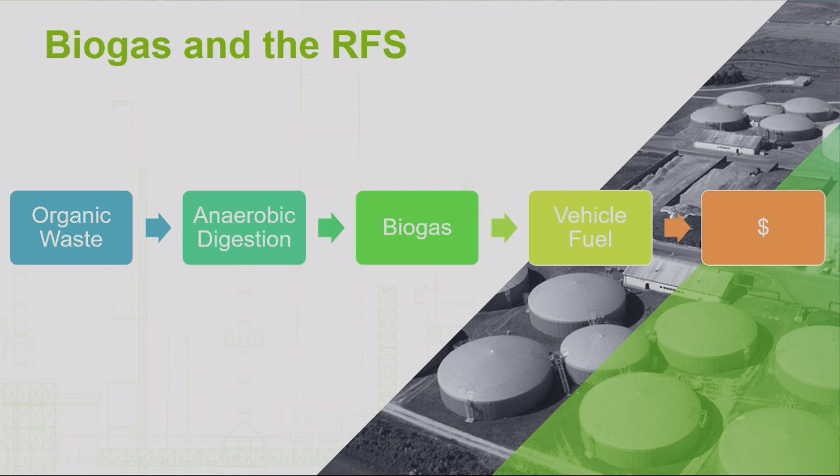So a little bit about the program behind this. It's called the Renewable Fuel Standard. It's a federal program instituted back in 2005 that really came to fruition in 2008. What it does is mandate that an increasing percentage of our nation's vehicle fuel comes from renewable sources. The idea was to get away from foreign fuel and reduce greenhouse gas emissions.

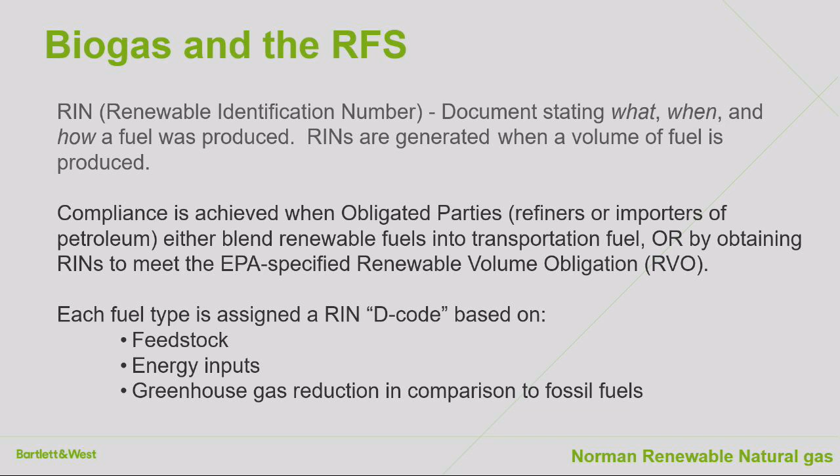Compliance in the program is achieved when the obligated party either blends renewable fuels into their fleet or purchases RINs to say, hey, we're doing our part to bring renewable sources to the market. Obligated parties are people blending fuels—it's big oil, it's BP, it's Shell, and those folks, ConocoPhillips.

So the flow of gas: you're taking raw gas from your digester, we purify and compress it, and once it becomes pipeline quality, you can produce that RIN. The gas and those RINs are traded to an energy service provider or third party who takes possession of the physical gas and those certificates. They sell the gas to end use, and the end user dispenses it as compressed natural gas or liquefied natural gas. The RINs are then sold to the obligated parties, and they provide that revenue back to the producer—in this case, Entegrity.

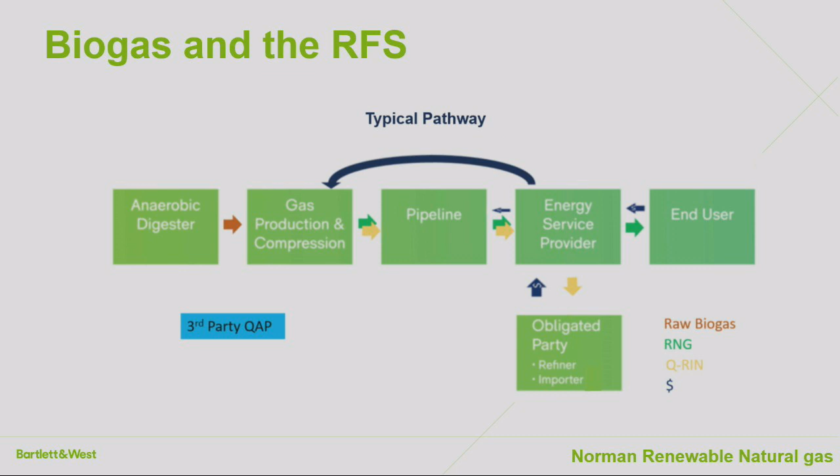The reason a lot of these projects are funded by third parties is because there are risks associated with the program. If you go back to that original chart, the program expires in 2022, supposedly. There's legislation being drafted that would extend the program, but right now we don't know what the sunset looks like. The law states the mandate is never to be lower than what it was in 2022 going forward, but who knows—we're hoping it will increase, but that's one of the risks they're willing to take on.

RINs are traded in a volatile market. Two years ago, a D3 RIN was worth $2.35.

In July of last year, they were worth 45 cents. Now they've gotten back up to about $1.30.

I'd already written down, what's the market like, and what's the city's risk? Does the Entegrity contract absorb any problems with the market that might happen in the future?

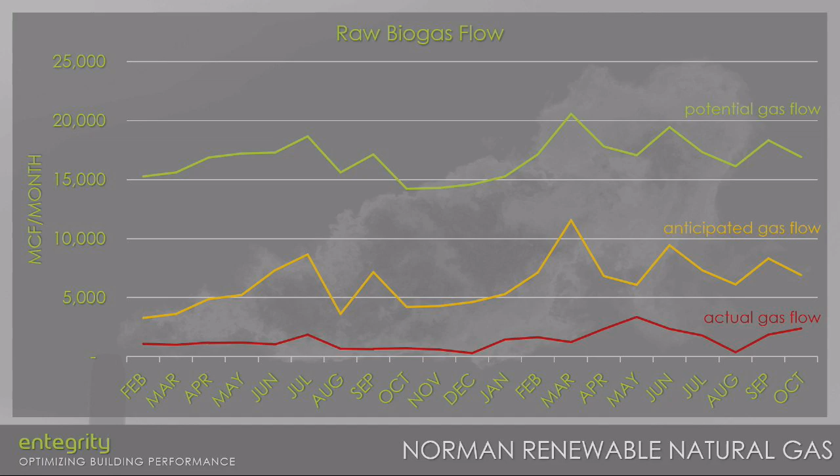We've got to get their business. On that food waste note, there was a study done at a couple of universities gathering up their food waste and digesting it for this same purpose. It makes sense to do that on a university scale, and our university is bigger than a couple of those projects currently out there. I'd say university and public schools are definitely a good source.

Councilmember Bierman: Speaking more generally, as discussion about our changing recycling program has continued, there's been a lot of talk, and I've been part of generating some of that talk about food composting. We have a compost facility that is mostly for lawn waste. We don't have any kind of institutional program for food waste collection, and I believe a city like Norman is far more predisposed to something like that than the majority of other cities in Oklahoma.

I definitely think there could be a possibility there, even if it's just giving educational material on how to collect it themselves and bring it in. I think Ken knows their composting facility for lawn waste is hopping all the time, and I have no doubt the same would be true for food composting, as long as we tell people what to do and how to do it.

Councilmember Scanlon?

Does this impact at all the drink-your-wastewater project? What impact, if any, does this have on that project? Oh, this would have nothing to do with our reuse project. This is all at the front end — no, actually, this is at the tail end. This isn't doing anything with the water side of it.

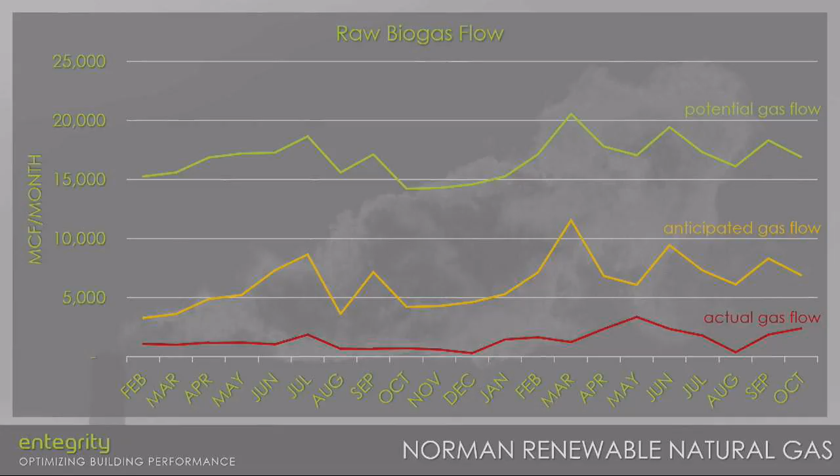They said, I'll talk for you — you can tell me if I'm wrong. They said that municipal waste actually carries better gas than just food waste. So as we grow as a community, they would reduce the amount of food waste added to the digester. We'd still have a full digester, starting out with food waste, and as we grow as a community, we'd just lessen the amount of food waste going to it.

So, food waste that we add to a digester — when we sell that gas, we get D5 RINs, and those are trading at 43 cents. Anything that comes from the wastewater plant is a D3, trading at $1.60. So it's in everybody's best interest to put as much wastewater solids in there as possible.

Councilmember Wilson: Where does animal waste fall in that? She really wants to give you all of our dog poop. It'd be D3. Bring on the dog poop — we got you covered. Dan, you put a dumpster out there and you got it, buddy.

This slide is about the Wasatch Resource Recovery Facility, which is in Bountiful, Utah, which is kind of a suburb to Salt Lake City.

To simplify this, I don't know how many of you saw Dan Aykroyd do the Bass-O-Matic thing during Saturday Night Live a few decades ago, but that's essentially what we're doing. We're putting a lot of food waste through a super blender, following that with a screen to make sure we catch all the plastics and everything.

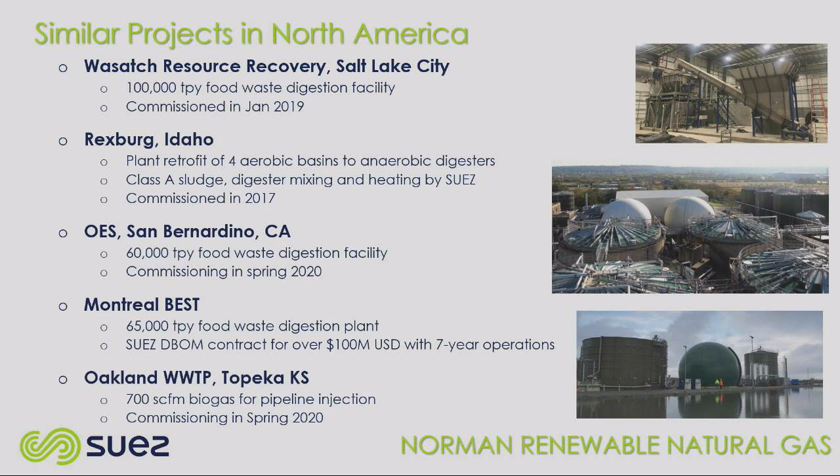Some photos, and then if you wanted to see what an upgrading facility looks like, this is from Bartlett and West. Yeah, I can narrate a little bit.

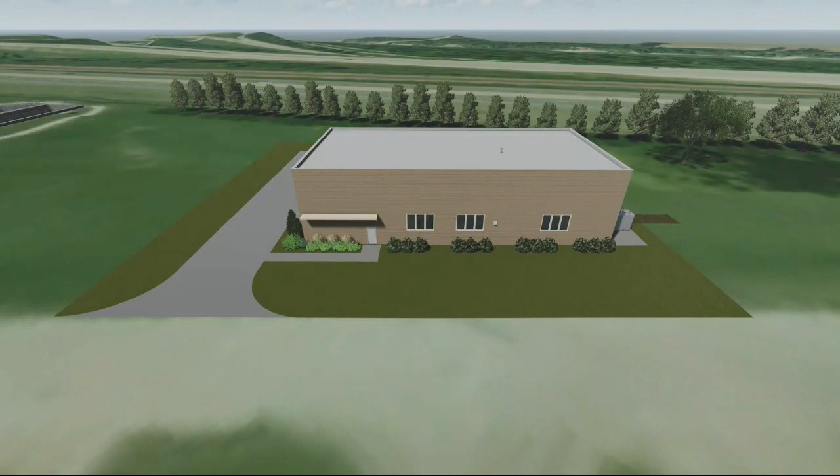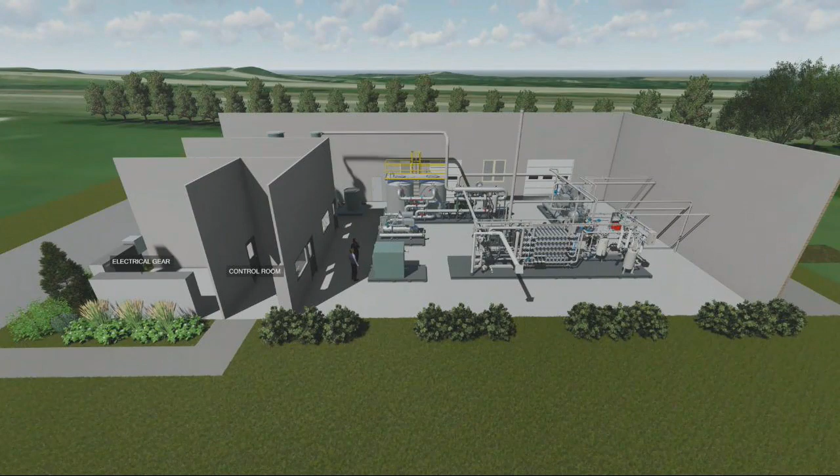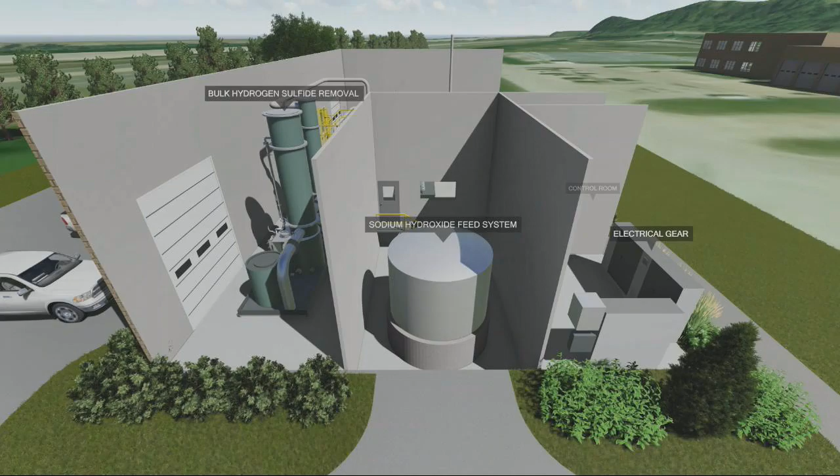This is a project up in Sioux City, Iowa. Sioux City is not a real big city, but it has a really high concentration of food producers in the city. It's kind of a food manufacturing mecca. So we're taking gas from their wastewater treatment plant, anaerobic digesters, purifying it, and injecting it into the MidAmerican Energy pipeline system there.

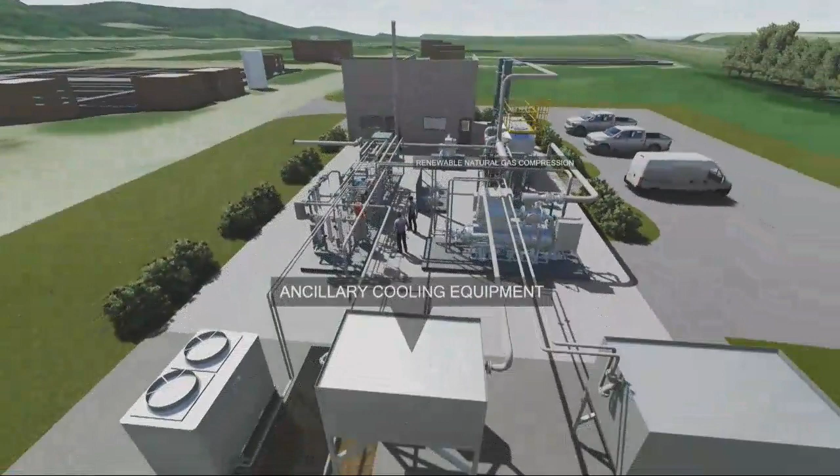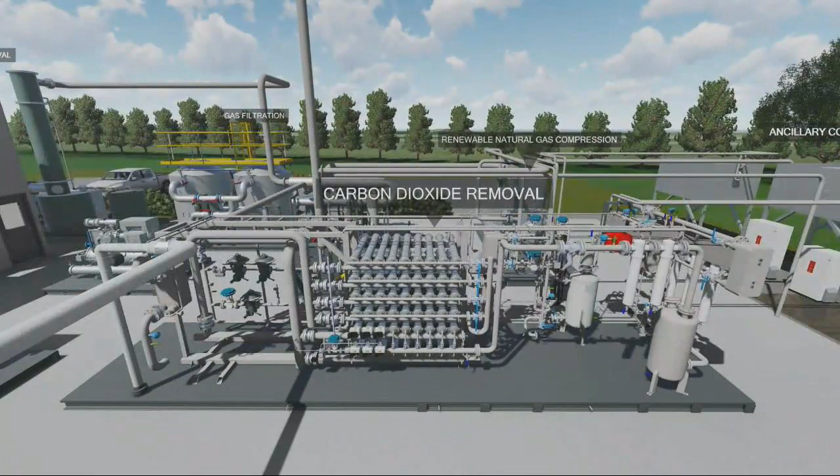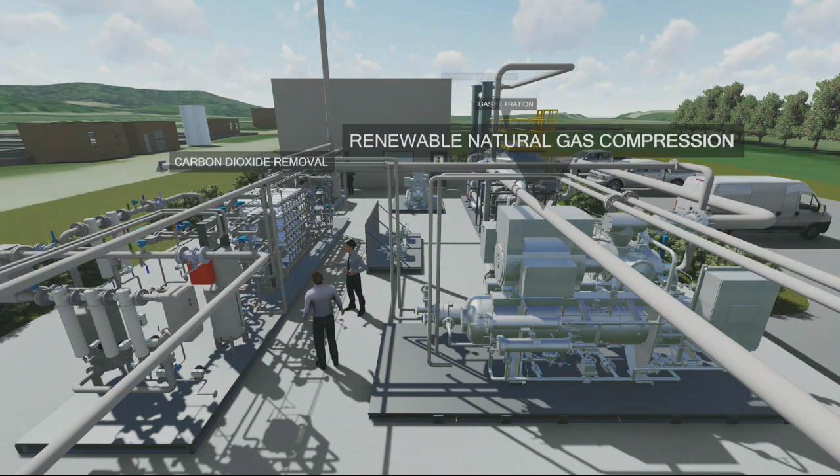This first part you're seeing is taking out moisture and hydrogen sulfide out of the gas. There are impurities in raw biogas that have to be taken out. This main part here is to take out the carbon dioxide. Biogas is probably about 35% carbon dioxide, so that's the major component that needs to be taken out. That system you saw is a membrane system, and it's very modular and can grow with the size of the program that potentially would happen here.

What happens, Councilman Wilson? What happens to the CO2, or the carbon dioxide, whenever?

So in their case, we're actually going to use the CO2 to do some chemical addition in their wastewater treatment plant process, to drive pH so that they can reduce the amount of chlorine that's needed to disinfect on the way out of the plant. So it's going to reduce their costs in that way too. There's a growing market for using liquefied carbon dioxide in the frack business. Use it as a fracking carrier for the sand that keeps the frack crevices open, and you're putting it down so far in the ground that they consider that a permanent sequestration of the carbon.

Okay, Councilman Bierman. What safety risks are associated with facilities like these, and what mechanisms do you put in place to mitigate them? Yeah, great question.

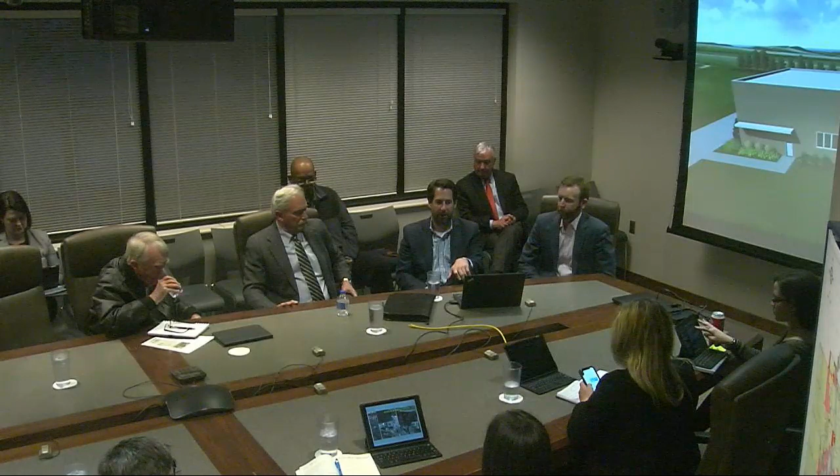There are definitely physical safety measures that will be put in place with the gas collection coming out of the digesters. You already have much of that equipment in place today. We would have to look at the sizing of that equipment to make sure that whatever increases of biogas are brought about are accommodated. It's not likely, because I think this is probably going to be small enough, but it could come under OSHA regulations because of the amount of fuel that would be produced on site. It's something we'll have to study and help SUEZ determine those requirements. But it's going to be natural gas on site, something you're probably using today. I'm guessing you bring natural gas into the plant. So they're somewhat accustomed to that equipment already.

This purification system will be owned and operated by them, and so those people will be qualified to be able to handle that equipment.

My concern is just being so closely located to one of our city's assets. Just to the north of that is our animal shelter, and just to the east of that is a neighborhood. I don't know anything about this process other than what I've heard tonight, so I just want to be sure we are considering and ensuring as many safety precautions as we can, especially since there's not real great access otherwise out of Jenkins. So just making sure we've got a lot of city assets in this area, and a lot of human assets over on the east in the neighborhood, and that this facility and what you do there is done in as safe a manner as possible is something I wanted to mention.

Ken, would we be looking to construct—they mentioned two potential locations around the plant. Is that on spots that we already own?

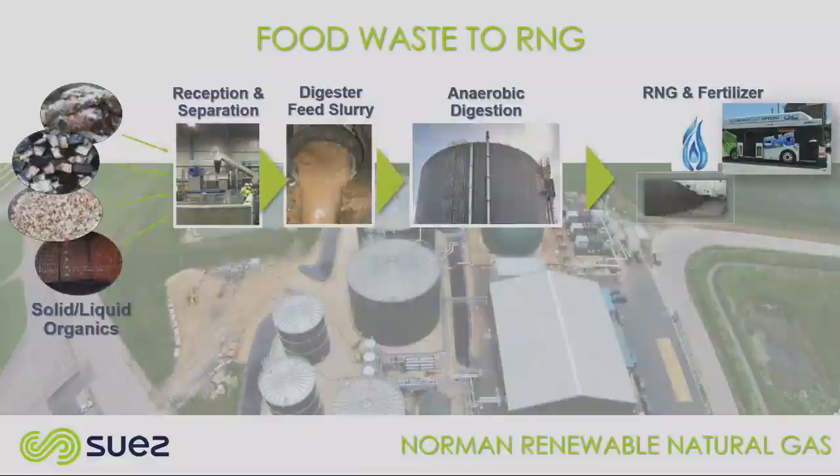We had a shot of that slurry, which isn't very attractive, but basically you'd pump it over to your digester—there, digester feed slurry. It's not very attractive, it's just peanut butter. That's right, just peanut butter.

So really, that's it—the next steps. Obviously there's no action tonight, but just something to keep in mind: it would be an amended project development agreement, and then we would perform the study, perform the financial analysis, and hopefully get that land under option and take off running. Are there any further questions from council about this?

Sure, it'll be coming back. We'll bring you back an action item on the council then.

Well, I think it's very exciting, renewing or reusing waste products that we're generating here in our community and maybe in the communities around us. I think it's a pretty good thing for us overall, so looking forward to learning more about it. Thank you, thank y'all, thanks for your time.